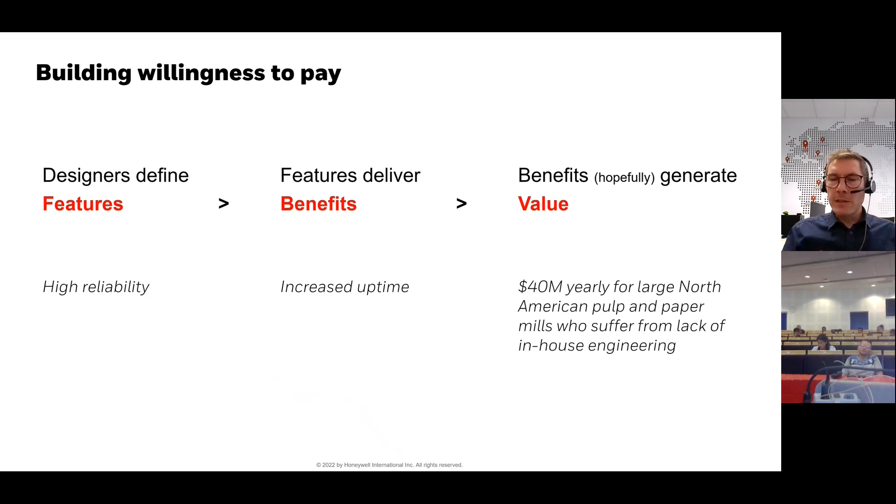How attractive is your product or your offering? And basically, the cost of the problem that you solve. You remove some incentive for the customer, and the rest is the value of your offering. All right. So now, how do we make features that deliver that value, either in emotional triggers or in functions, like straightforward functions?

But your end user is not necessarily a beginner, and your end user can be a Formula One driver, an Air Force pilot, or basically highly trained, super high cognitive skills, super good motorics, super fit, whatever. And you know, you don't need to do intuitive for those people. So what is important is affordance and adequacy. So affordance is the ability to be understood.

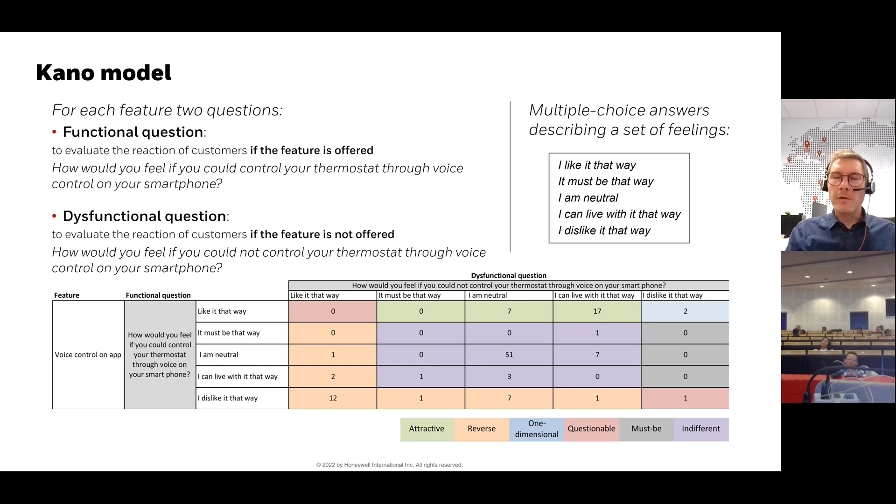Now, what I just said about not spending energy doing something that the market doesn't want, I would say that's applicable even for what the market wants. Like, don't waste your time and company resources on stuff that is not going to help anybody. Again, who are you trying to help? What problems do they have? Deliver on that and don't deliver on the rest.

But here's another example. When I was your age, DVDs were not that old and they were still kind of cool. And so the first DVD players had a display that was showing you how many seconds or minutes had passed, how many tracks there would be, that kind of stuff. And quite frankly, at the very beginning, it was useful because people like me were used to stuff that gives you direct feedback. When we were playing a VHS tape or an audio tape or a CD or an LP before, there was always some kind of feedback. You knew that thing is turning and the sound is coming soon.

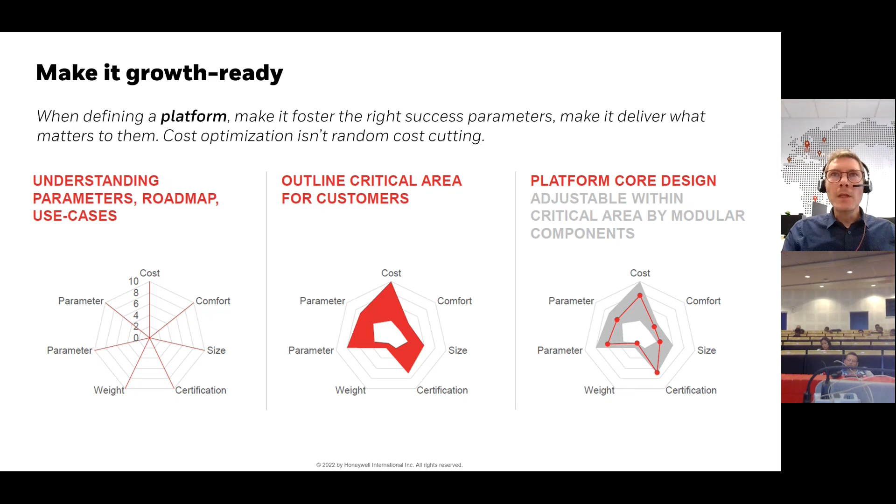So again, in the questions: what problem am I solving for whom? Why these problems, not others? What are the success criteria? How high is the bar? What solutions do you have and why will they work? Actually, hidden in those questions, there is also the topic of sustainability. What is the business model that is going to work? Maybe for some things, rental is more sustainable than selling. For some things, it might be the other way. So ask yourself those questions.

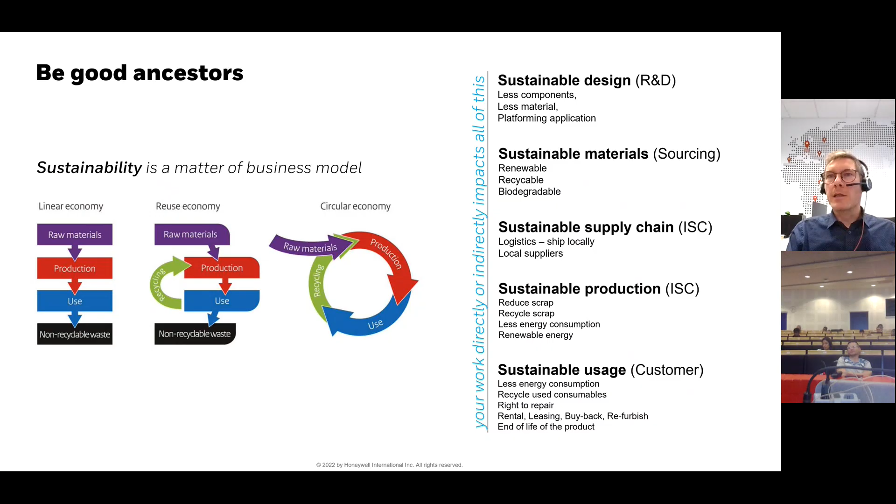As a designer, I think you have the right, and by the way, an engineer or anyone in a company, you have the right to voice concerns and opinions on every single aspect. Each function owns the decisions related to their function, but you have the right to influence the decisions of every function. And this is easier to say than to do. It's actually really hard to do when you are in a very large organization with very rigid structures. But still, it's our responsibility, all of us, to ask the right questions and try to make things better on that field.

And as I mentioned, if you are a freelancer, it's even more useful, because when you work in an agency or as a single freelancer, as I have done in the past, you even more need to justify what you're doing and to justify your invoices to the customers. So then your ability to feed the family and pay the rent is at stake. So really, those questions are fundamental.

That's basically the thing. I have here a video, and I'm gonna, if I manage, put the link in the chat just in case the video does not really work. It's a presentation video of a tripod that I worked on 7 years ago.

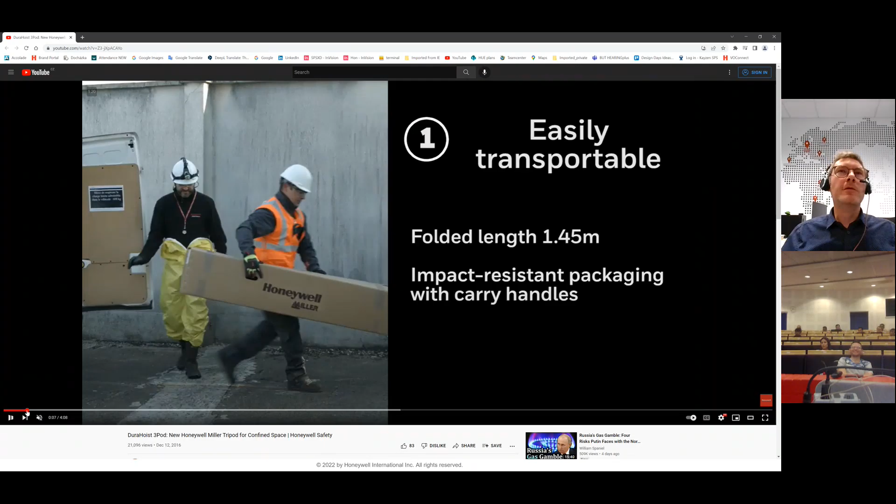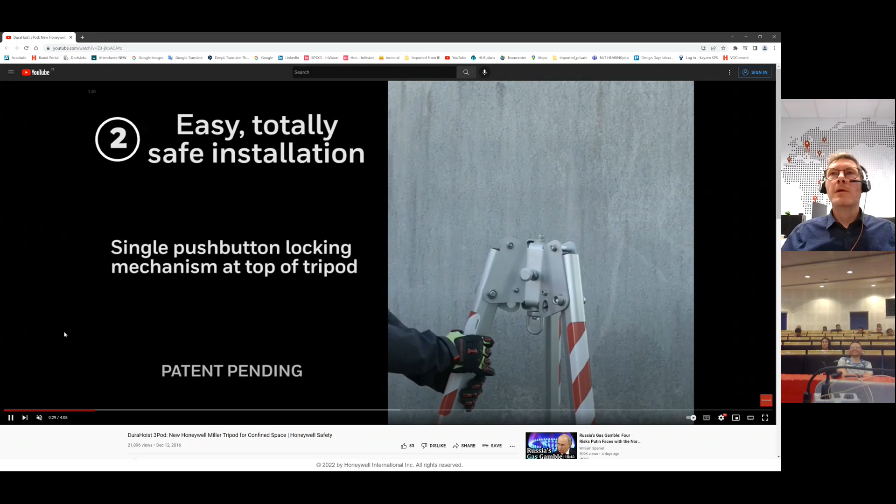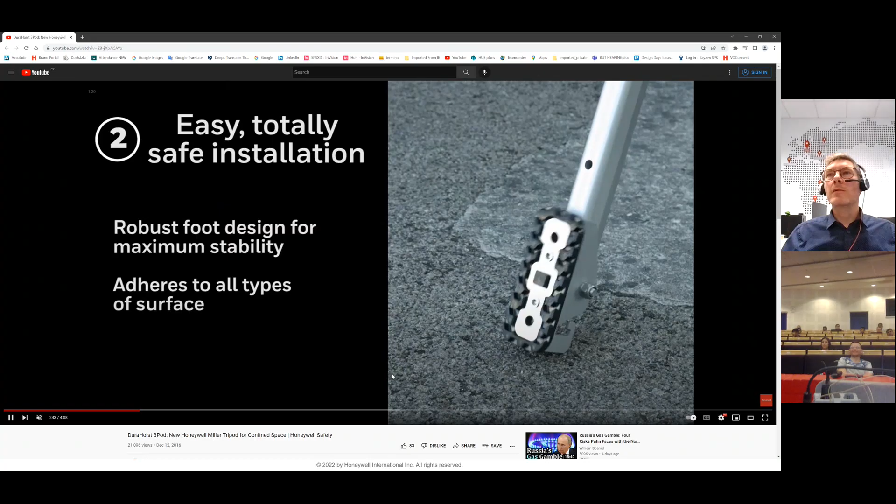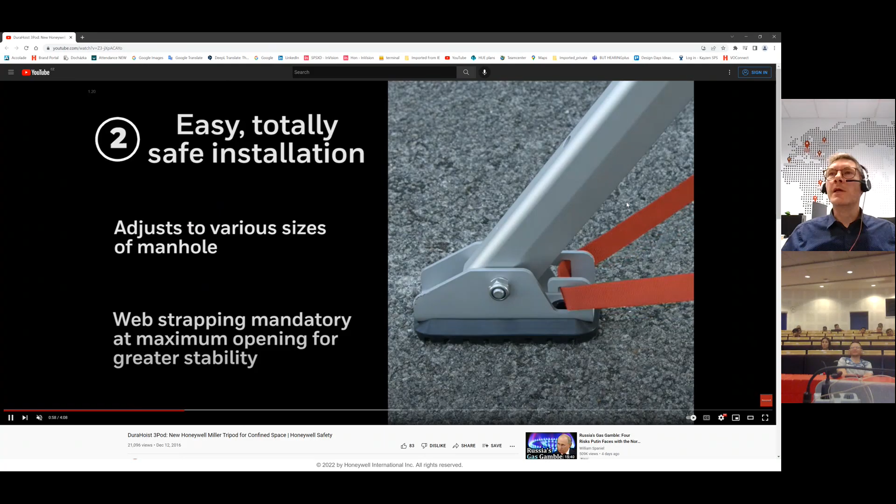He can carry it by one hand, which is already not what competitors offer. He can open the 3 legs, they are locked with one button, and the legs are synchronized. So he pulls on one that opens the 3 legs. Here, the leg comes out fully and doesn't fall out. The foot self-balances, so it's always in the right position. There are 3 positions depending on the diameter of the hole that you want to be above. For the big diameter, you need that webbing for safety. And we designed the leg so that it's super fast and easy to put the webbing in the hook of the leg.

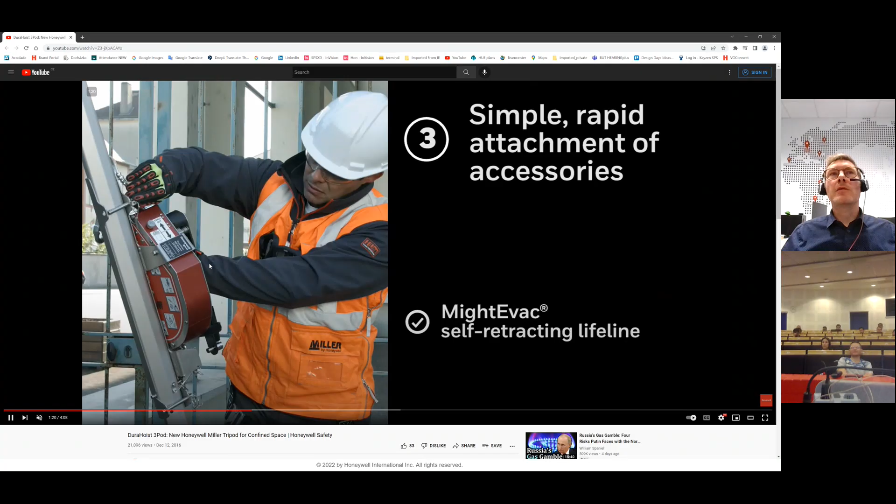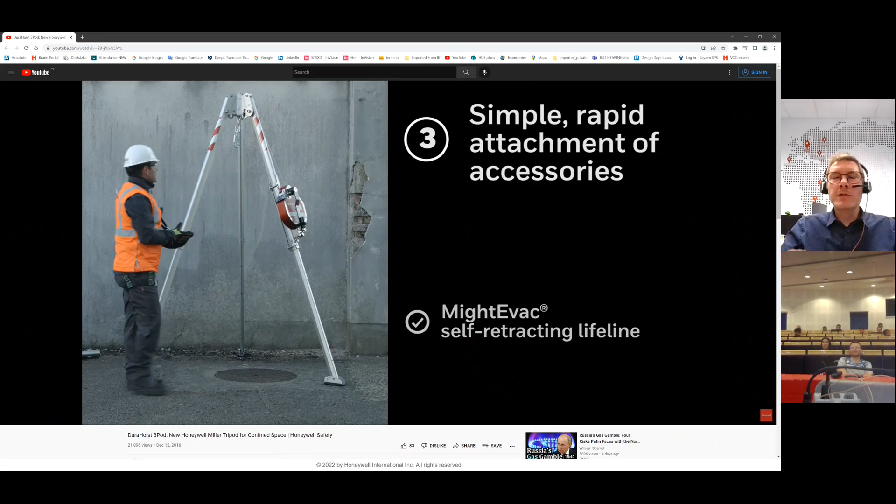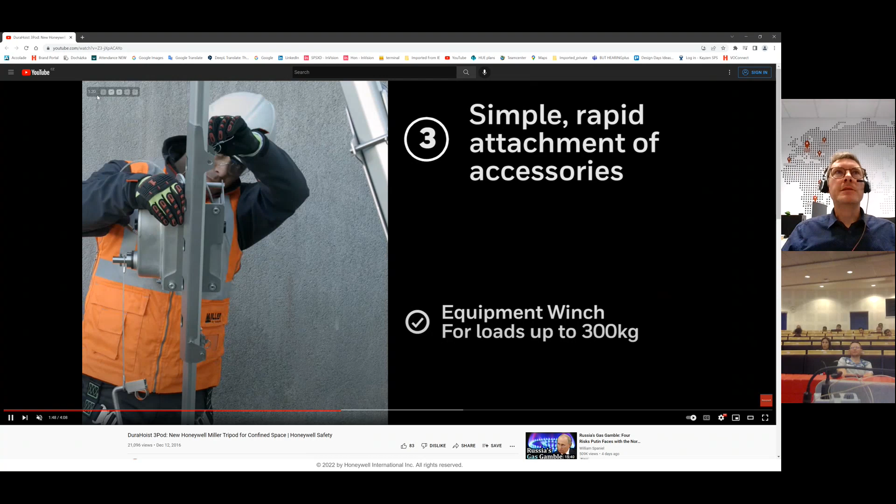Now, this is a winch. Actually, that's the MightEvac. So it's a self-retracting lifeline. We put it on a bracket so that while you are securing it, you don't carry the weight. That thing is 15 kilos. So on some competitor products, you need to hold 15 kilos in the air while attaching it. Now, ours, you hook it on and then you secure it without effort. Same thing for that winch, which is for equipment like tools and stuff. I made it a bit accelerated. I can accelerate a bit more.

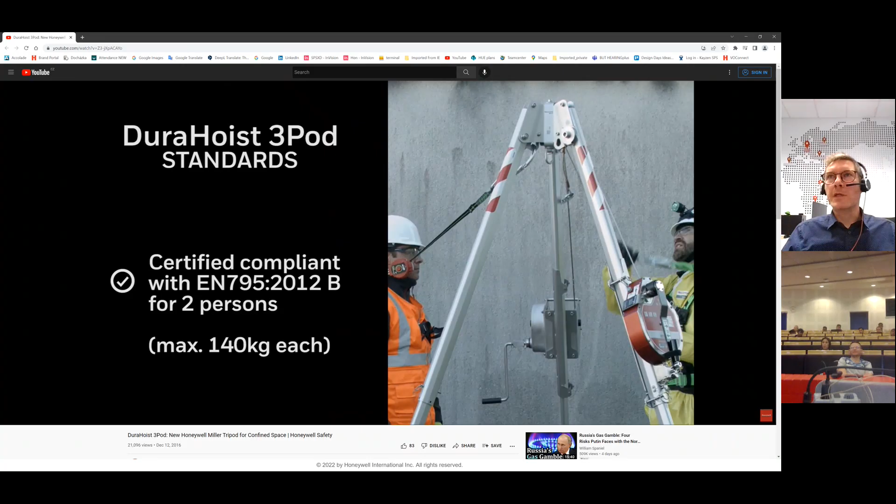So then another thing is 2 guys can be attached. There's always one guy that stays at the surface and one guy that goes down, for safety reasons. There should always be someone able to rescue the other one. So he goes in. They're both attached because the guy at the top could accidentally fall in the hole. So now he has to rescue his friend, so he's using that rescue device. And obviously the tripod has to be stable at that point. Let's go a bit further. So now he's bringing tools, for example. That's just what I already described.

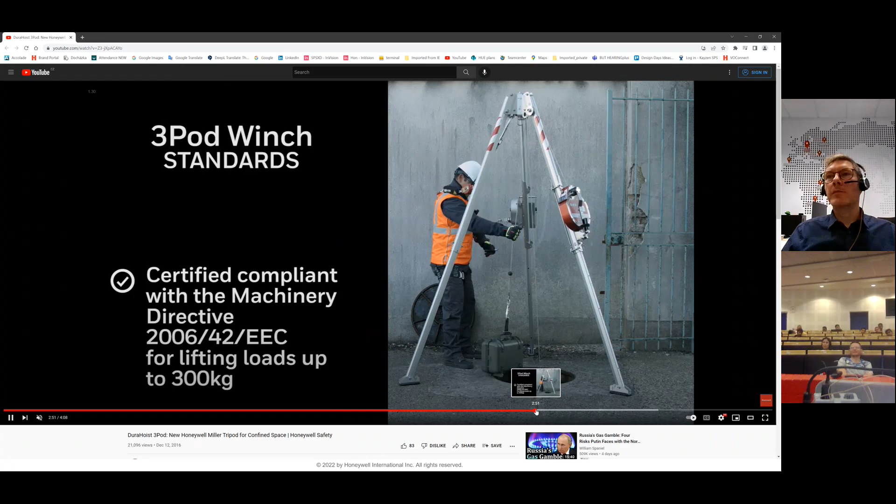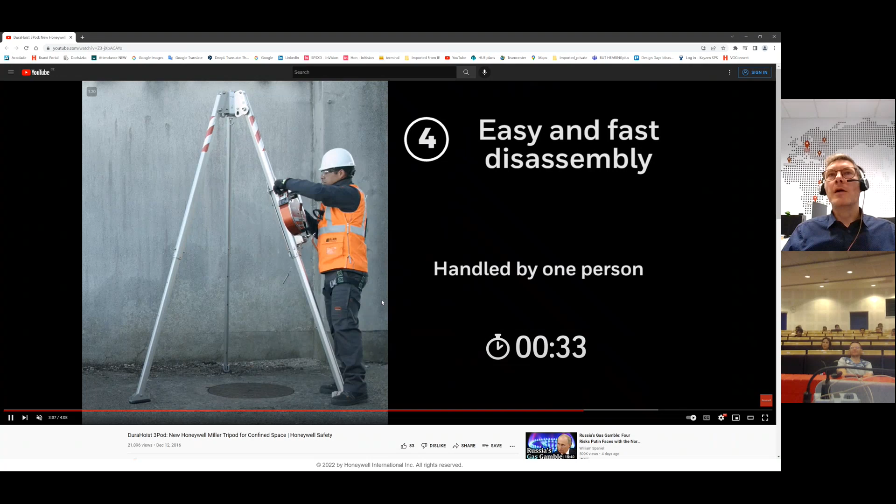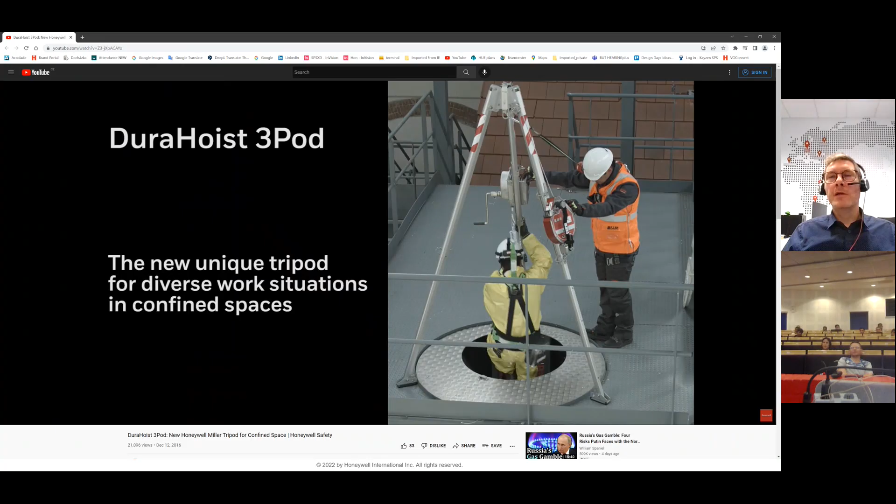You see standards and directives, of course, matter. Now, we actually did it on purpose in the commercial. We have a chronometer for how long it takes to fold it back and bring it back into your vehicle. I've seen videos on YouTube for competitor products where the guy basically struggles for 10 minutes. In ours, in 33 seconds, it's folded and you can carry it by one hand alone. That's, I think, just a bit redundant stuff. Yes. So I'm going to go back to the slide. And basically what I wanted to highlight here is that the, sorry, where am I?

Here. What I wanted to highlight is that the basic function of the tripod is to be there and carry the weight, and all the competing products do that. But we understood and realized in our process that the pain is not when they are working in the manhole. I mean, we cannot do anything about that with the tripod, but what we can do is help them transport, help them save time and energy installing it and uninstalling it.

I have that habit to tell the engineering team: think of the worker. It's Friday, November, rainy, windy day, end of the day, like 4 or 5 p.m. outside. He has to pack his stuff, and the phone is ringing. His wife is asking him when the hell he's going to get home. That's the point where there is time pressure. The guy is fed up. He's tired. Doesn't want to do the job anymore. Cold fingers, pain in the muscles, etc.

That's what we're trying to solve. Remove all that pain, not the pain from the core of his function in his job, but the pain in the preparation before and after.

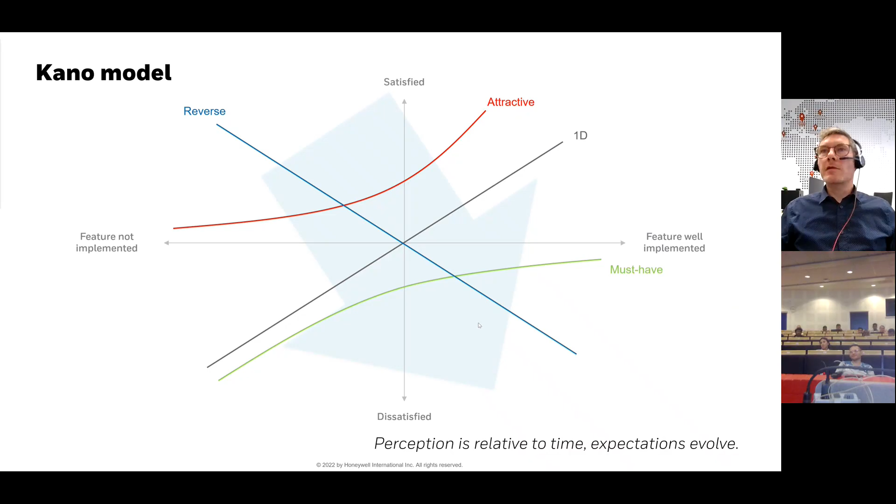Okay. Yeah, another question. That slide with the steering wheel, so one was intuitive and the other one complicated. It was intuitive and where was it? Here. Intuitive and expected, and then affordance and adequacy. Isn't it better for most customers when the product is intuitive? Like for example, the stand at the end, it'd be better when it's intuitive, even though the users are experts and professionals.

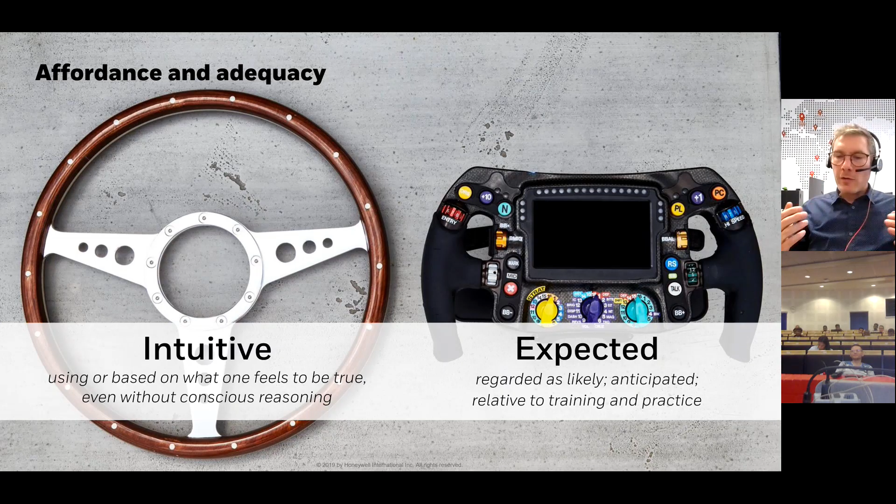So I would say that's what I mean with affordance. The product is tailored to the level of practice and training that they have and the expectations that they have of how it's going to work. It is true that if you do something so surprising, so out of the ordinary that they don't know how it works, like Citroën used to do, that you didn't even know where to put the key because it was on the left and every other car had it on the right. That's just dumb, because you just frustrate the user, and usually users don't like to feel stupid, like most people, right?

But if you define intuitive really as the thing that does not require any thinking or any reasoning, then you need to make things more simple. Okay, let me say that. As long as your offering is satisfying the user, meeting all the expectations of the user, and is easier, more intuitive than competing products, you're doing good. Obviously, yes. It's not wrong to do intuitive stuff if it's not a compromise.

But if you make something intuitive, which becomes frustrating for the expert because you have removed a whole bunch of features. Like, imagine someone is an expert at Photoshop, and you say, no, you don't need all that stuff, here is another software that just has those 3 brushes and you're good. Quite frankly, I probably only use 10 tools in Photoshop, but I would be frustrated if someone would tell me you're such a fool, a beginner who knows nothing, that you have enough with those 3 tools. I wouldn't like it. I prefer to have Photoshop.